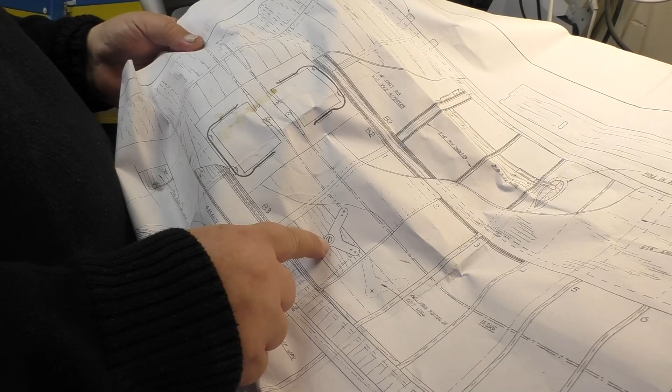Right, so here is the bell crank for the flap there, and what they're showing for the second one is to move it out one panel and flip it round the other way. Okay, we don't actually need to do that.

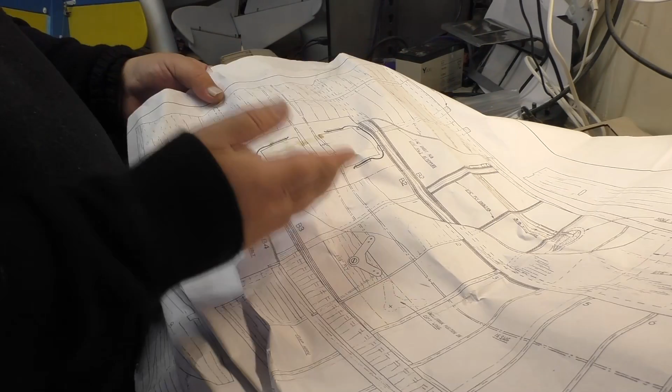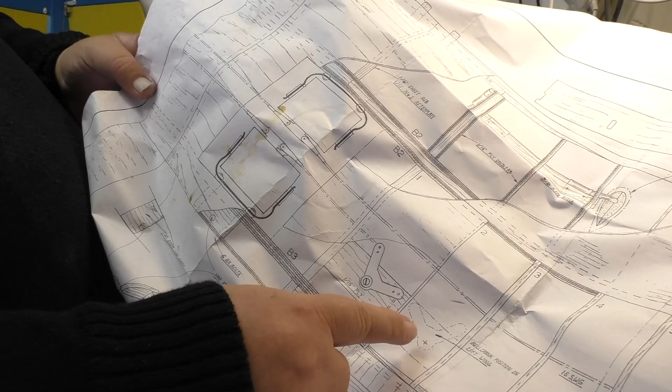If we mount both of these the same way round so that they're a mirror image of each other, and we drive it off the top and the bottom of the output arm of the servo, then they'll both work in the right direction. What they had on here, because they were driving it with this linear servo, one was pulling, one was pushing, so they had to flip the direction round by doing this. Now, if we go on the top and bottom of the output arms, we don't need to do that, so we can just mirror that over the other side. Bob's your uncle, it's done.

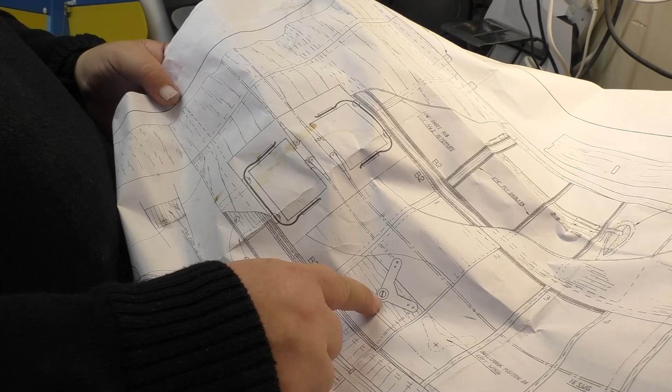So, yeah, we've got to make a ply plate - I think I've already made it, hopefully, when I did the first one. Got to obviously drill a hole in it, mount the bell crank there in it, glue it all in. I've already made up the push rods, so these are the two push rods that are going to go in there like that, one that side, obviously one the other side.

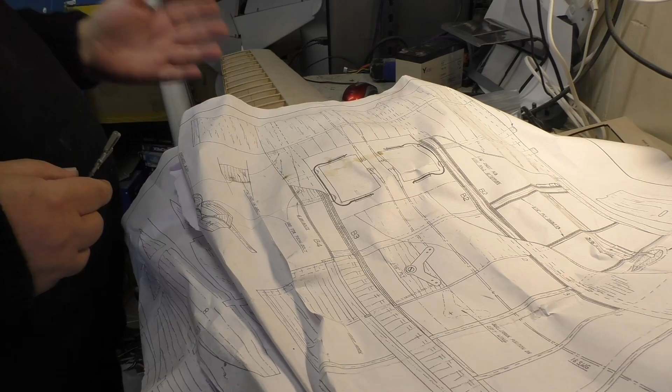Yeah, so I mean that is the plan. Once that's done, we can start sheeting over that centre section a bit, which is what we need to do, so we've got the proper shape of the wing. We'll sand the wing then, and then we'll know what shape needs to fit into the fuselage.

So that is what I'm going to do. I'm going to find that plate, drill some holes, blah blah blah, copy what I did here, glue it in there, back when I've done some of that.

Okay, so I've made up that plate there with the bell crank on it, and I basically made it so the screw is a tight fit in the wood, so you had to screw it through the wood, and then there's a nut on the back there as well, which I've then also epoxied.

Yeah, you're not taking this out again anyway, because it's in basically a sealed area of the wing, so you want to make it as solid as possible, so it's not going to fail. So the next thing has got to go between these two ribs over here and be glued in. So what I'll do is mix up some epoxy, put it on there, push that in, glue all around it, make sure the distance is the same as this one.